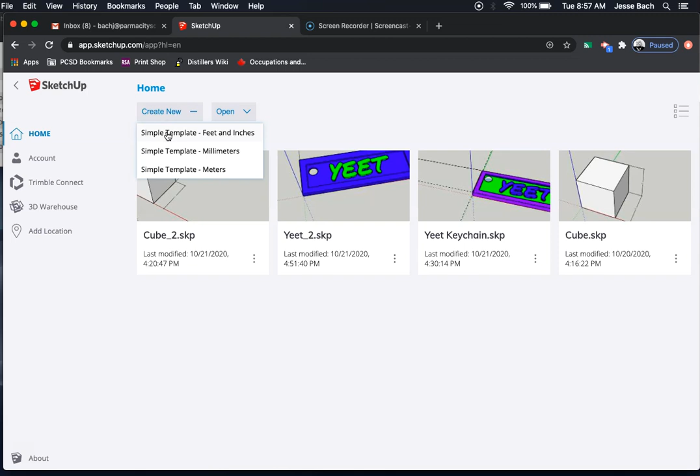So I'm going to create new, select feet and inches right here, erase our nameless faceless person right there, head over to the rectangle tool, and I am going to want to make a rectangle.

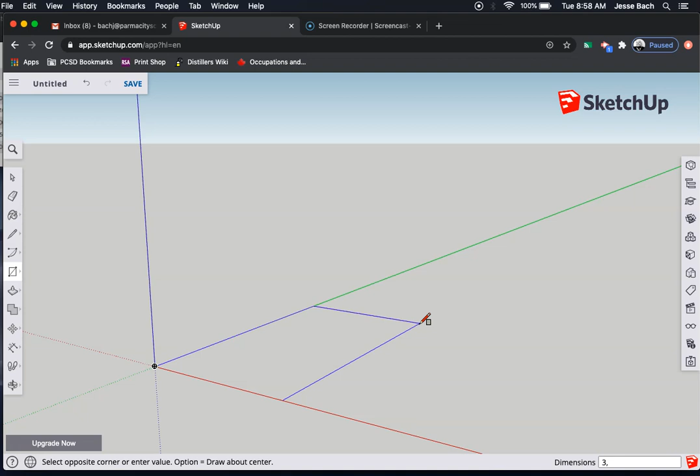Click on the origin, drag it. Now, one of the big problems everybody faces is they click off this rectangle. If you click off it, it defines the size. I'm dragging back and forth, I haven't clicked anything. All I'm going to do is enter the number 3. If you look on the dimensions tab, it has a 3 there, comma, 1. That is going to draw me a rectangle 3 inches by 1 inch.

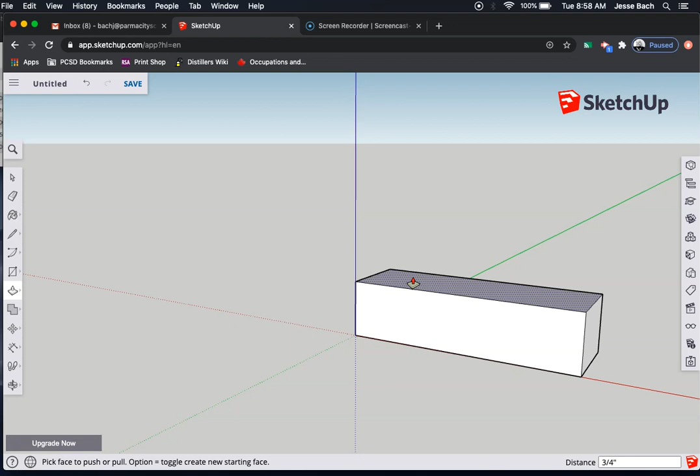Now I've got that rectangle. I'm going to push-pull or extrude it up. Watch the distance. I'm going to bring this up 3/4 of an inch right there. So that is my starting phone holder or tablet holder distance.

Let me bring this on around so I can draw on the end, which I've got right there, and head over to the pencil tool or the line tool. Now, this one is where you're going to need the accurate thickness of your phone or your tablet.

I am working on my own with a Galaxy S20 with a sweet OtterBox case. That's why I walk with a swagger.

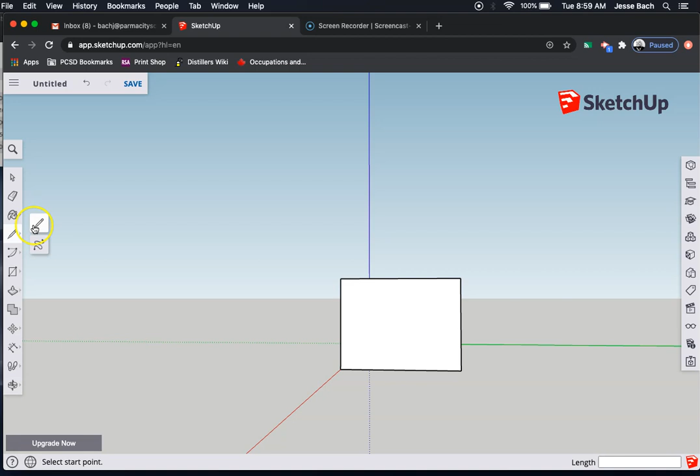Click on the line tool, and I am going to zoom in just a little bit. And you see how it clicks on there? See how it goes from a purple triangle to a little red box and says on edge. Click on that, and then you can see I can draw a line.

Now, depending on what angle you want your phone or tablet held at, you can go completely vertical like this, or at a slight angle. Be careful about going too much at an angle because then the entire thing will fall over. For me, I'm going to go at just a slight angle.

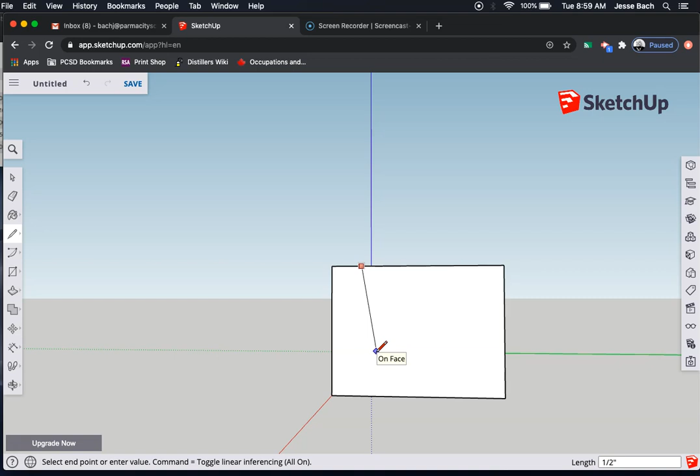Now, if you look at the length box right here, mine is going a 1/2 inch deep, so my line is a 1/2 inch. Click on it. Now I'm going to go to the right. If you watch my length tab right here: 3/8 of an inch, 7/16, and a 1/2 inch.

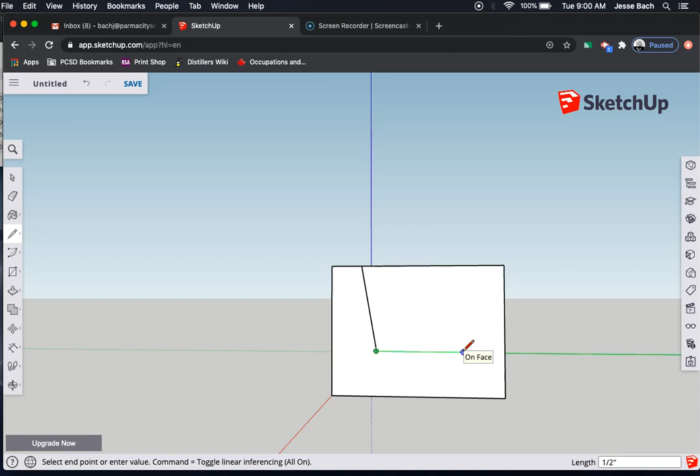If you remember, my phone with the case on it is a 1/2 inch thick, so click on a 1/2 inch. The thickness of your phone might be different; whatever it is, that's what you want to work with. Click on 1/2 inch, and I am going to match that angle. See how it clicks on there on edge and the box changes? If you don't do that, you're going to have great difficulty extruding this or push-pulling it after the fact.

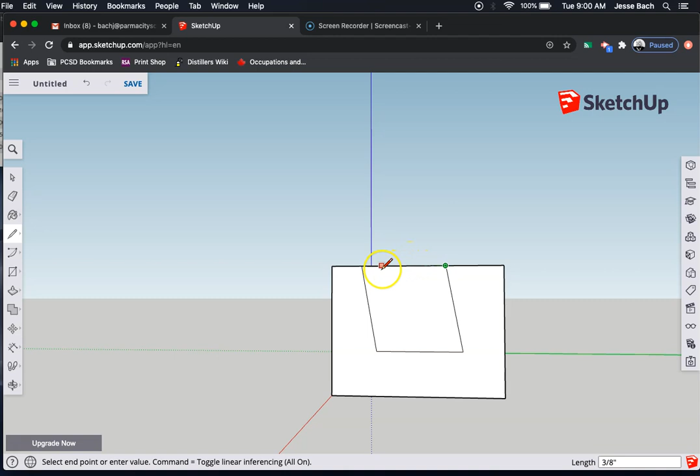Click on edge, and now from the end point, one more line to the end point right there. Now this is a closed shape. If you forget that top line, it's not going to push-pull out for you.

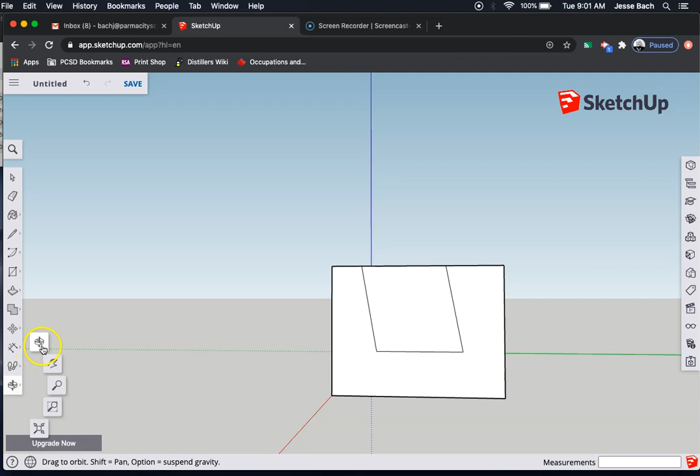Click the push-pull tool right here, and you're going to be able to see that you can select that area. If you don't have it reference the edge all the way down, all the way to the right, all the way up, and then all the way around to make an actual closed shape, it's not going to allow you to push-pull.

So right here, I can go to the push-pull, select this, and just pull that right on out. So what I have now is something that looks like that right there. And we are all happy.

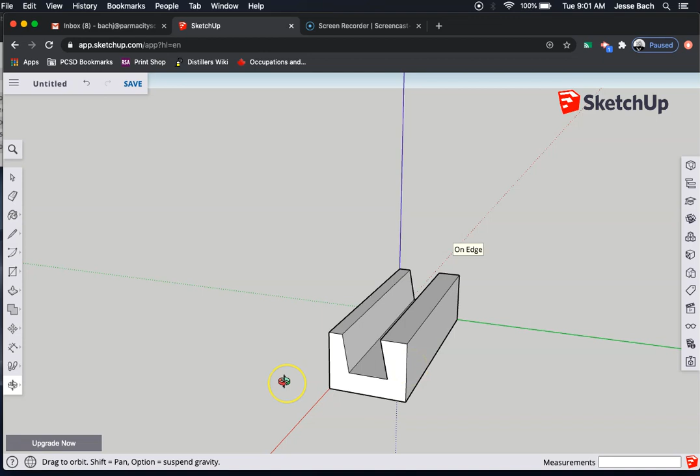This is a basic cell phone or tablet holder. If you're working with a cell phone, the 1 inch by 3 inch works just fine. If you are working with a tablet, you can use the push-pull to extend this on out at this point if you wanted anything longer.

The only thing I ask that you do right now is save this. We are going to be working on some other videos where we're going to be modifying this, doing some holes for the charger cord and everything along that line. So right now, go ahead and save this. Stop this video, rewind, and replay as many times as you need in order to get the concept.